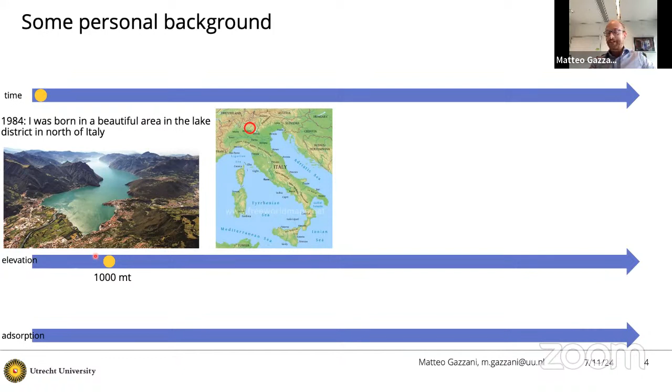I was born in 1984 in a beautiful place - here you see some pictures, north of Italy, where the elevation is about 1,000 meters on average, I would say. Then I moved to Milan for my studies, as already mentioned by Giuseppe.

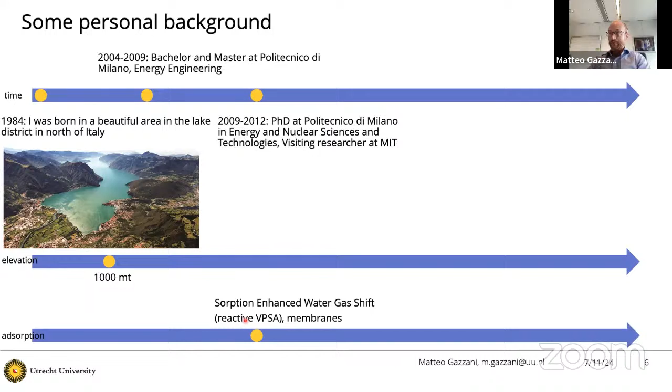During my PhD that I did still in Politecnico, I also started developing my knowledge in adsorption, working on sorption enhanced water gas shift, so a sort of reactive VPSA, and also on membranes for hydrogen separation. Then I moved to Zurich as a postdoc, decreasing the altitude to around 400 meters, but increasing a lot my, let's say, knowledge in adsorption. I worked there on TSA, VPSA, PSA with Marco, Lisa, IAS, and many others, looking at separation of CO2, hydrogen, and nitrogen as well.

Then I continued the line, reaching about zero level, so close, if not below. And today I am an associate professor in Utrecht and in TU/e, and I still work on adsorption quite a lot, mostly looking at challenging separations like CO2 capture from air and methane removal from very diluted streams.

I would like to start with why do we need plant and system level analysis. I'd like to walk you through an example. Here you see two technologies: one on the left, carbon capture from a power plant in Texas, the Petra Nova plant, and on the right, a fuel cell for automotive transportation in personal cars.

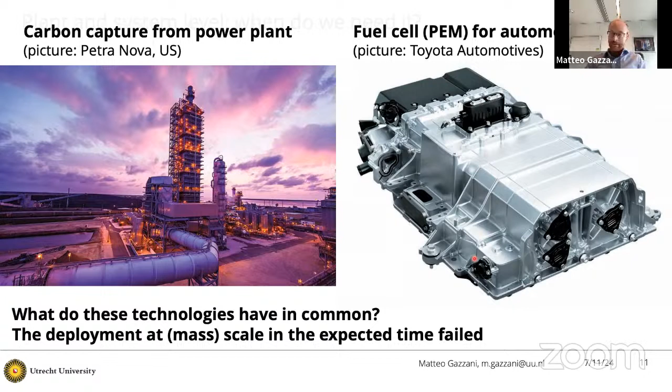You may wonder, what do these technologies have in common? I would say that deployment at mass scale in the expected time failed for both. It's interesting to see that there were a number of common reasons.

There was a wrong primary market on power. CCS looked at the power sector as the very first application, fuel cells worked for personal transportation. In both cases, we had big limits from an infrastructure perspective: CO2 storage and transportation for CCS, and hydrogen production and refueling stations for hydrogen. Also in both cases, we had viable alternative solutions: PV and wind turbines for power plants, and battery electric vehicles for personal transportation.

Also, in both cases, there was a lack of a big enough market. Markets were very localized; instead the big national or international markets were missing—lack of a CO2 emission market, lack of a hydrogen and fuel cell vehicle market. And finally, last but not least, they both experienced problems when it came to societal acceptability, notably CO2 storage or hydrogen on board, let alone the cost of fuel cell vehicles.

This just shows that essentially technologies really need to be developed while keeping in mind their role in the broader energy and material transition. Otherwise, the risk is that we develop technological solutions that are beautiful and work very well, like the two we see here, but they miss their role, and they will miss the deployment at the required scale that we need for the energy and material transition.

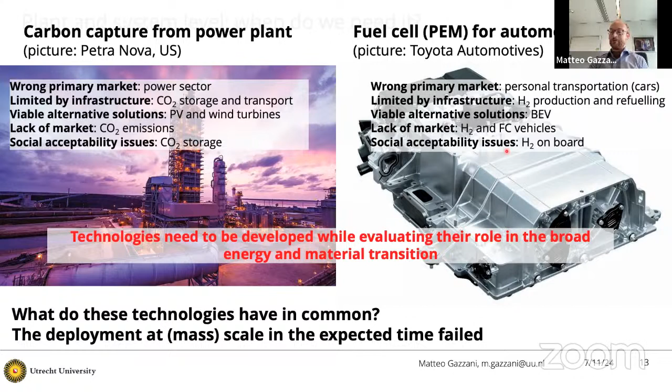Now, if we focus a bit more on CO2 capture, it's interesting to see that starting from around 2010, the number of studies on adsorption-based CO2 capture has really picked up. Today we have around 400 to 500 papers published every year on the topic of adsorption-based CO2 capture.

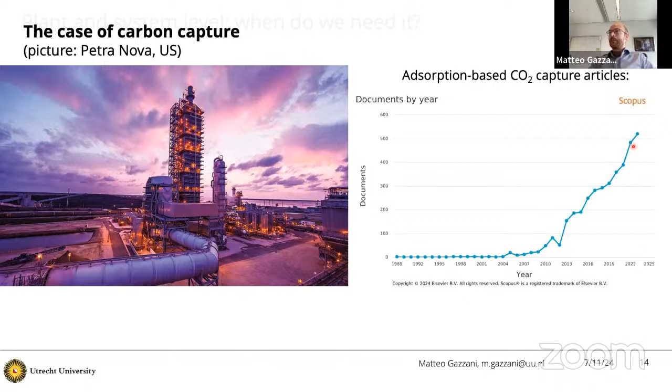In fact, if we look at the cost of CO2 capture, we can see that early on, when the technology started to take off in academia, there were predictions on the cost by IPCC in the order of 50 to 100-plus dollars per ton. There was also a target set by the DOE around 30 or 40 dollars per ton of CO2. Now 20 years and more have passed, and we have built a few plants—if we stick to the power application, Boundary Dam, Petra Nova, and maybe Shand—and the cost has not decreased.

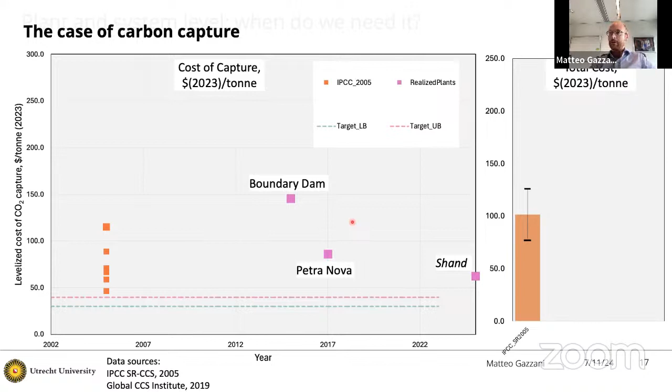Of course, what would you expect from real, first-of-a-kind plants? But notably, if we also plug in a lot of numbers from research—research has been developing and producing a lot of material from pilot to laboratory to simulations—we still see that the cost actually went rather up than down.

So again, creating a sort of disconnection between the expectations, especially the DOE targets, and what was then identified by the many researchers—essentially giving a sort of reason not to deploy the technology because it's perceived as expensive, when it's not really expensive if you think of the role of CO2 capture in the energy transition and in the mitigation of CO2.

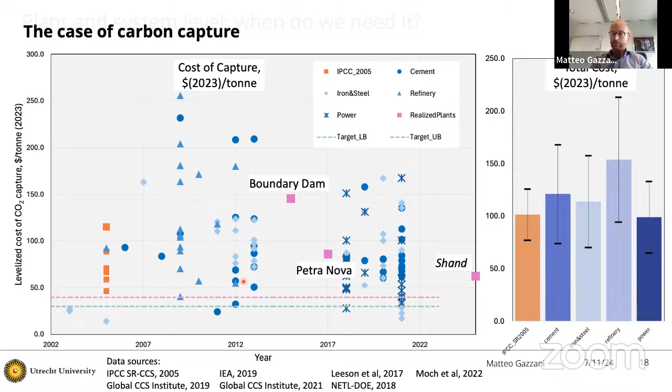This was a kind of introduction to say that we always need to reach the level of plant and system analysis. I really encourage researchers to develop adsorption technologies also looking at the plant and system level. At the same time, I think there are cases where it's more relevant than others.

For example, when adsorption is really a key enabler of the separation, like the separation of highly valuable molecules, fine chemicals, mainly done by chromatography, the separation of toxic compounds like volatile organic compounds, whenever you have very strict environmental regulations, also for applications like wastewater and soil remediation.

So in these cases, plant and process level is important. It's important for optimal plant performance, but not really vital, because the adsorption technologies in this case are really what make the separation possible. So you want to get a better plant, better economics, but if you don't do the technology development following the plant and system level, it will not prevent the use.

However, there are other cases where this is not true. When adsorption is an option among several solutions, if we want to separate molecules in very large amounts, like CO2 separation from flue gas, hydrogen separation from syngas, air separation, or purification of biogas, where we have alternative solutions, it's really important, actually vital, that the technology development is done along with the plant and system level, or rephrasing that, the plant and system level steer the technology development in the right direction.

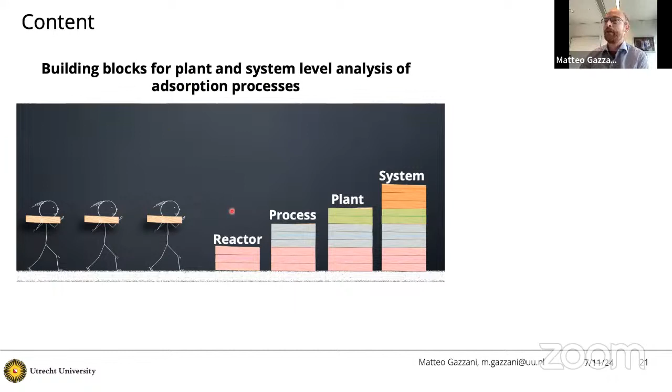In terms of the rest of the presentation, we are going to focus on the building blocks for plant and system level analysis, going from the reactor or column through the process, the plant, and the system level. We will do that by also looking at examples of applications.

Now, first, a few remarks. When we want to merge the reactor level to the system level, these different levels need to be able to talk to each other. So reactor models need to be embedded in the system level, and the system level should provide insights that are relevant also for the column and reactor modeling.

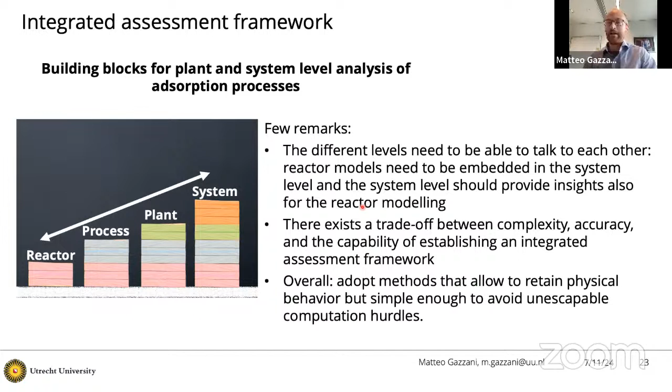Therefore, there exists a trade-off between complexity, accuracy, and the capability of establishing an integrated assessment framework. Overall, I would say we need to adopt methods that allow us to retain physical behavior, but they have to be simple enough to avoid running into serious computational hurdles that can't be overcome. So we need the right level of simplicity while retaining the physics of the system.

All right, let us start from the adsorption column. Here we have a really simplified description of the physical system. We have a column or some contactor where there will be a solid phase, an adsorbent, and a void phase. This system is described by a number of relevant thermodynamic properties.

To simulate such a system, we have powerful equations: partial differential algebraic equations that describe mass balances, energy balances, and momentum balance, for example with the Ergun equation along the bed. These need to be coupled with relevant initial and boundary conditions, like the feed condition, the pressure, and what we fix at the boundaries, like the inlet, outlet, and wall. There will also be a significant number of model parameters to account for, like physical properties, adsorption equilibrium, which is extremely important, with the isotherms, and also mass and heat transfer coefficients or models.

When we want to translate this into models, we have essentially three different relevant approaches. One is a very simplified 0D, well-mixed reactor. Then we can discretize this in one direction, the 1D, and then the 2D or 3D as the more complex versions of the resolution of this system.

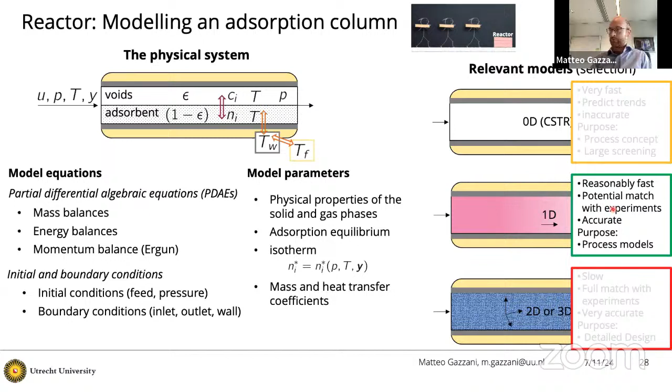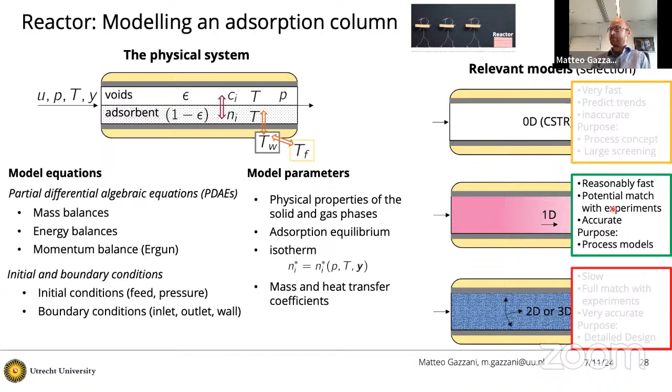Please use experiments to validate the model. There are really a lot of experiments, a lot of literature on breakthrough curves, and also based on small pilots that you can find in literature. So always you start with a 1D model, and when you are confident enough that your 1D model behaves like your physical intuition describes, go to the validation with experiments. And you don't need a setup in-house. You can really take data from the many papers that have done this.

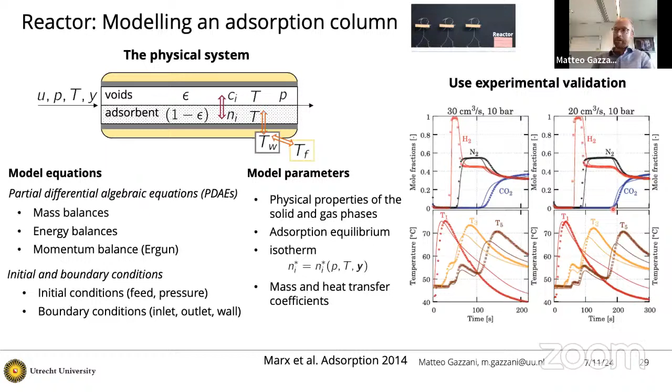All right, now after the column, we need to go to the cycle, to the process, essentially. Let's call it the process. So we need to model now the process for the adsorption process. And it happens that most adsorption processes are carried out in fixed beds, like PSA, TSA, VSA, VPSA cycles.

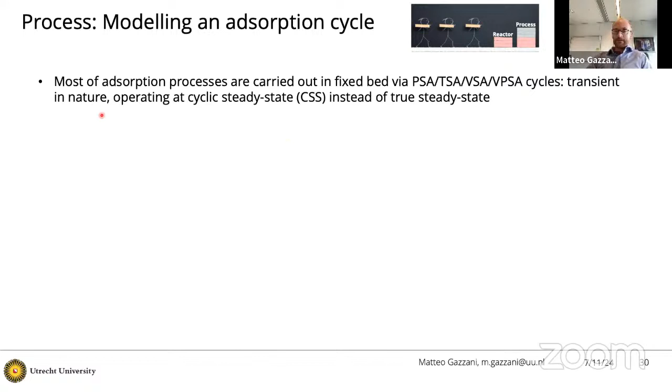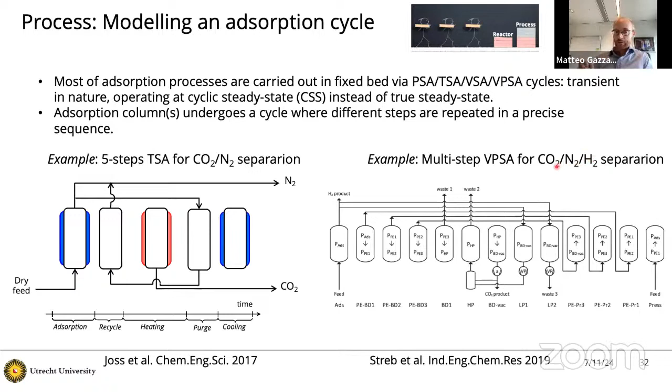So I'm showing these cycles to say that cycle design is a critical step, that even when you do plant and system level analysis, you can't underestimate this, and you really need to take this into consideration and do the proper cycle design that you would do whenever designing a process, even if you intend to evaluate that from a plant and system level. That's because the cycle affects the performance tremendously, and it's a building block of evaluating adsorption processes.

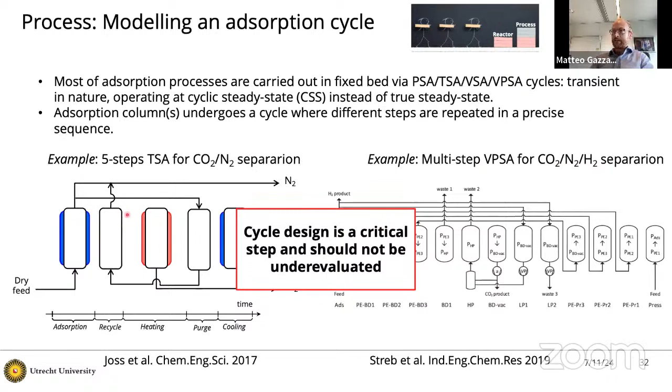Interestingly, this is of course true for a fixed bed experiencing a cycle in time, but is also true for a different configuration where you do have a steady state, like with a fluidized bed. This is an example of a fluidized bed with adsorption and regeneration. So it's a different type of process, still relying on adsorption, but on moving the solids rather than using the different distribution in the bed of the gas and the solid.

And let's say that the equivalent cycle can be designed now in a way in space. So you can identify the right cycle in space by subdividing the two main reactors into a number of reactors. So even when you have a continuous process based on adsorption, please take the reactor configuration, the process configuration into account whenever you also want to do the plant and system level study.

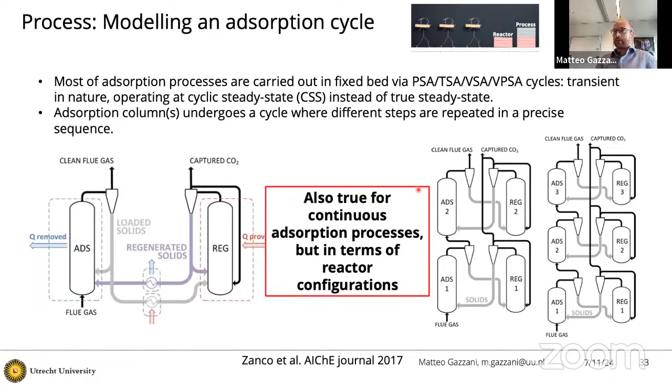Now, a few key points that I would like to highlight here. First of all, identifying cyclic steady state conditions is computationally expensive, because you need to solve the column level equations that we have seen before in an iterative way. For every step in the cycle, you need to solve this, and you need to do that until you find out that the internal composition and the temperature profile do not change, the product composition does not change, and the total mass balance is indeed respected.

So the typical approach, the common practice, is to use a fixed point iteration. This means that from one simulation, you take what you find as a final state, and you send it back as initial conditions for the next iteration. Most of the simulation tools actually use this approach. It's very solid because you go really, as it says, step by step, but it's also quite slow because you will need a large number of evaluations to identify the cyclic steady state.

So I would argue that the state of the art in this respect is tools that use different methods to speed up, accelerate the iteration, like using Newton type or perturbation methods. Levan has done a lot on this, but the problem with these methods is that in most cases they require, for example, the computation of the Jacobian. So you gain in the acceleration of the cyclic steady state, but you lose in the time to compute what you need for that acceleration.

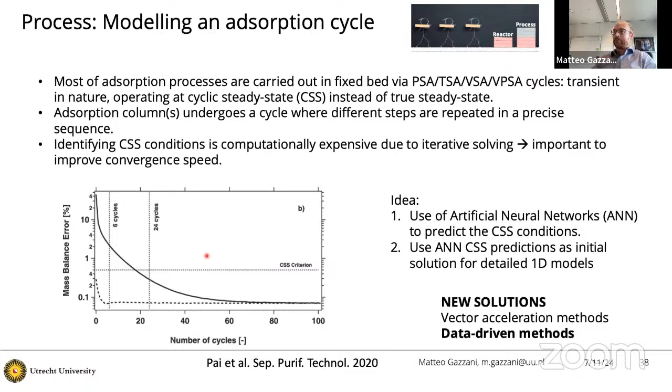Yes, 24. Or you can do it with the vector acceleration method, but eventually you have a faster approach to cyclic steady state.

If we continue looking at the needs for process modeling, I would say that something that is often underestimated is the scheduling of the cycle. So the scheduling is really needed to take into account all the idle times that will be present, especially for complex cycles, whenever you have pressure equalization, whenever you have coordinated rinse and purification steps.

For example, this scheduling will allow you to consider continuous feed. That's something that in a continuous process you want to have in a continuous plant. So let's think of a refinery. You want to have a continuous production of hydrogen in a way. You will be able to synchronize pressure equalization and also to produce continuously your product.

So when you include this scheduling, the performance of the cycle will change. I'm reporting here some results for a hydrogen CO2 nitrogen PSA, and you can see that the productivity of the cycle without scheduling is significantly larger than the productivity when you include scheduling. So we go from 550 kilograms of CO2 per unit time down to 350, and that's because if you want to have a complex cycle that delivers separation, you need to have enough number of columns.

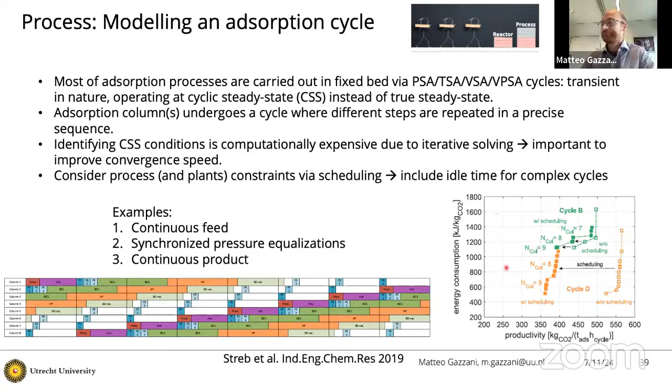Then I will also say that adsorption processes are complex and not necessarily intuitive. There are a lot of variables and the interplay between the different properties. So I think that we really need to make use of this nice tool that is rigorous mathematical optimization to identify the optimal conditions of the technology.

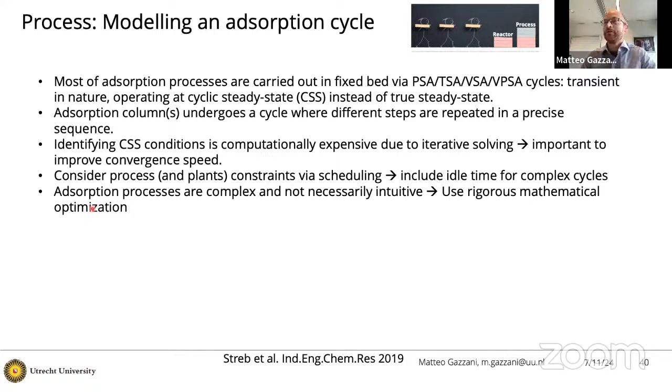Of course, working with a sensitivity approach, like scanning different values and seeing with your hands in a way how the system reacts, is always useful to improve the knowledge of the user. But eventually, I think that the process design should stop when a mathematical optimization is carried out. And I would like to discuss this part more in detail.

So there are a lot of decision variables that are possible. I'm listing here some, for example, the adsorbent material decision, the reactor geometry, the cycle configuration, the cycle step timing, which is very unintuitive at times, the column length, temperature, and pressures.

So these basically lead to three main classes. One is really the cycle, the operation of the cycle in terms of time step, temperature, and pressure. One is about the materials, what materials do I choose, and the other one is really the cycle configuration, so how do I arrange the different columns, what steps I need.

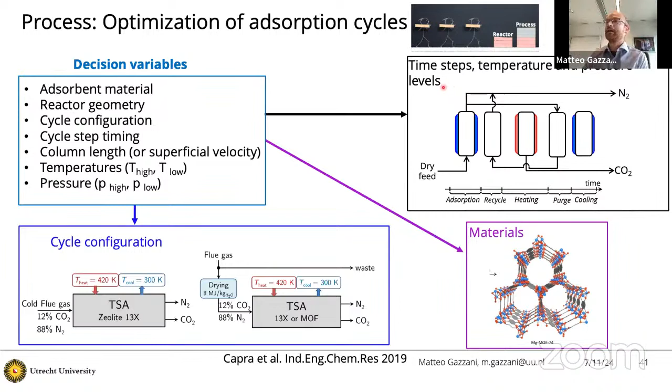I would say that while cycle configuration and materials are important, they are difficult to bridge to the plant and process level. At the time step, temperature and pressure level, mathematical optimization can be embedded in the plant and in the system level optimization.

Now, if you look at the possible approaches for this optimization, we have three main possibilities. The first one that you see here is a black box approach. So what we have is a bed model, let's say the cycle model, and the cycle will need to compute the cyclic steady state that we have just discussed.

And on top of this, we can have the optimization. We can optimize for a number of objective functions. We'll go back to this later. But essentially it's a hierarchical approach: the model, the cyclic steady state, and the optimization.

In a second approach, we can bring together the optimization and the cyclic steady state. This has been done by Pantelides and co-authors, for example, and you can ask your optimization algorithm to fulfill the cyclic steady state condition as part of the constraints of the optimization problem.

And let's say the most extreme case compared to the hierarchical one on the left is where I want to solve everything at once. So the equation-oriented approach, where we bring in optimization, the bed model, and also the cyclic steady state, and also the partial differential equations together in one, and we solve everything in one go.

Let's say that approaches two and three are of interest, but I think that for adsorption processes, the first approach is the state of the art, and also the one that allows interplay with materials and with contactor design easily.

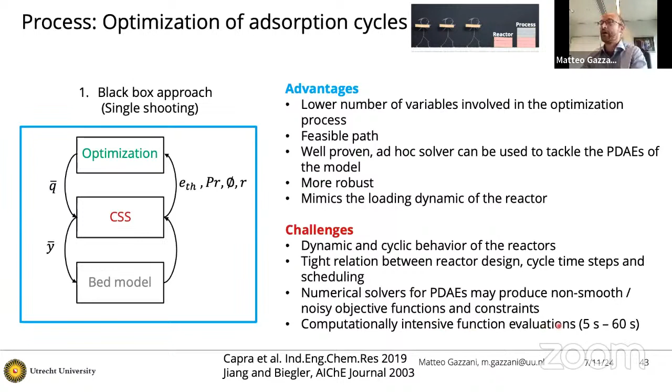And the bed model and the cyclic steady state, as we have already mentioned, are computationally intensive functions that may take from a few seconds up to minutes.

What are the computational approaches to this? I think there are three main avenues. First, we can solve this optimization problem acting on the bed model. This means that instead of using a detailed model, we use surrogate models of the 1D model. We will go through this later.

The second one is to act on the CSS, as we discussed before. So really try to do the optimization with an improved CSS computation, so that overall the objective function evaluation that the optimization sees is not particularly computationally intense, because we do the CSS in a smart way.

And finally, we can act on the optimization algorithm itself. So we can think of tuning algorithms or designing algorithms that deal with the problem, with the features of adsorption cyclic steady state type of problems.

Now let's start looking a bit more at the first approach. I'm taking this from a recent work of Anne Streb and Mazzotti. What they did was have a 1D model, and based on that, they trained an artificial neural network with process parameters and feed composition, making a surrogate model by training the network using data from the 1D model.

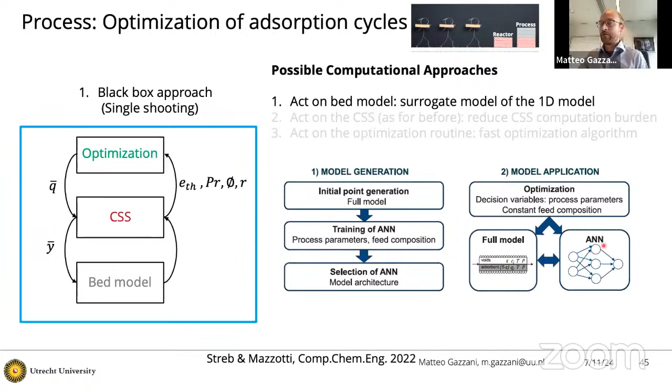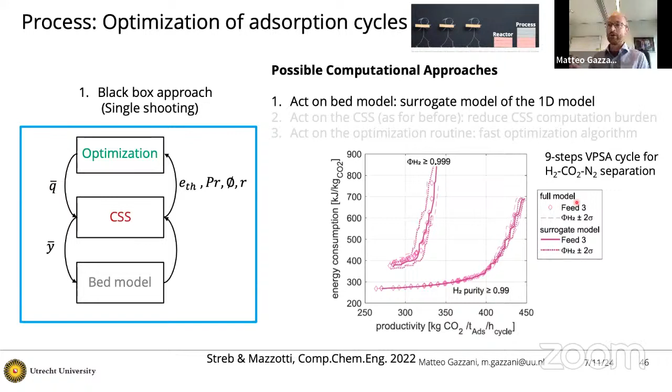You can see that essentially the surrogate model, shown as the continuous line, found the very same Pareto front as the full model. This is, I think, a very promising approach. Please be careful with your training—at the end, everything here boils down to doing the right training and using the right approach.

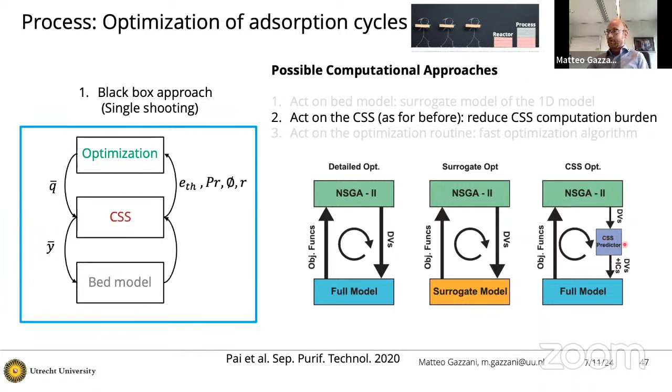Looking at the second approach, here I'm using the work of the group of Arvind Rajendran, who have recently worked on this. They compared detailed optimization, connecting a genetic algorithm to the full model, the surrogate approach using artificial neural networks and other machine learning approaches, and the case of speeding up CSS via a data-driven approach. They have shown that this approach of speeding up the CSS works rather well.

The last one is identifying the right optimization routine. That's where we have worked a bit more, and I would say there are a lot of opportunities in this field as well. Essentially, there are different optimization routines you can use: gradient-based, evolutionary population-based, or model-based, derivative-free.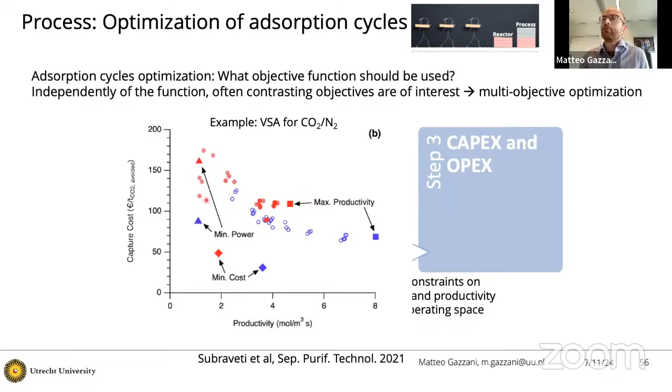By doing this, you may find interesting things. For example, from the work of Subraveti and Arvind Rajendran, they identified that the minimum cost cases - shown here in black, blue and red for different materials - differ from the maximum productivity or minimum energy cases. So these three steps that I was showing before are really helpful to reach the optimal case, and are needed to identify how your system behaves depending on the different boundary conditions.

All right, let's move now to the plant. This will be quite quick. When we go from the process to the plant, I would say there are two main cases. On the left is a simple plant - for example, the adsorption process plus impurities, or the adsorption process plus heat integration. The second case is a much more complex plant, for example the full industrial process, like a refinery, or the example I'll give later with TSA in a cryogenic air separation plant.

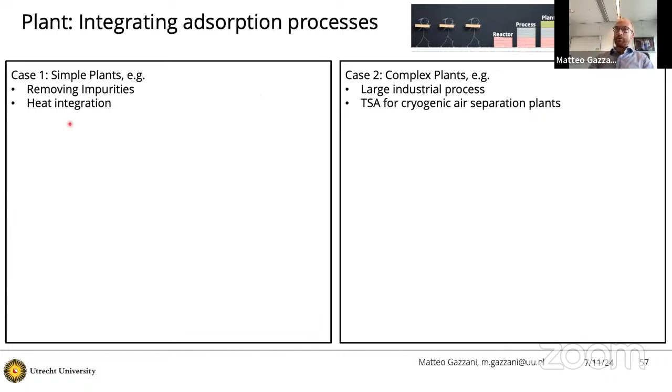Looking at the simple plant on the left, the example here is removal of water along with the TSA we discussed before - because your material, like a zeolite, doesn't want water in the feed. The suggested approach is to keep the adsorption model as the 1D model, the same one used with optimization. So the plant-level analysis can fully rely on the 1D model or any surrogate model you've proven works well. Then you can add simplified energy and mass balances for the additional components, such as heat exchangers or a drying unit beforehand.

When you go to a complex plant - here I'm showing an example from my PhD studies where we wanted to integrate the adsorption-enhanced water gas shift into an integrated steelworks - we had many different reactors, and a lot of different power equipment like gas turbines, heat exchangers, and heat recovery steam generators. In that case, it would be very challenging to use the 1D model. So my suggestion would be to go for a simpler model, but be sure it sticks to the physical behavior. This is nicely done by a 0D model or a trained neural network that you've proven behaves correctly across the whole range of operating conditions.

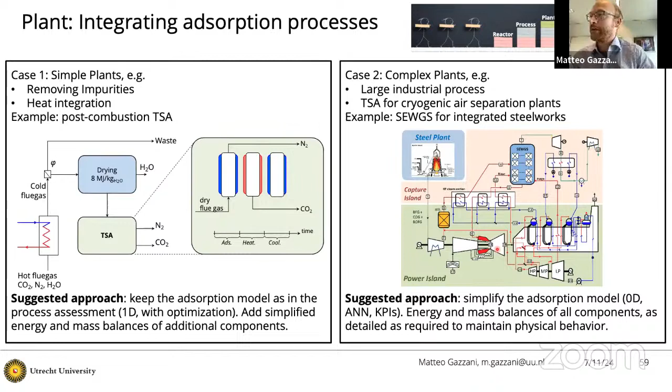And then you can add the energy and mass balance for all other equipment. For example, in this case we were simulating the gas turbine in quite detail with the 1D model because we were particularly interested in that as well. So you need to find the right equilibrium between the thermodynamic description of the model, and here again, simplifying the adsorption process at times is an option.

Now, moving to the system level - but first I think we need to describe what a system is. A system is the union of a process and plant together with everything that counts from the outside world. So typically we have our adsorption process embedded into a plant with a number of processes, and this plant needs to interact with the system.

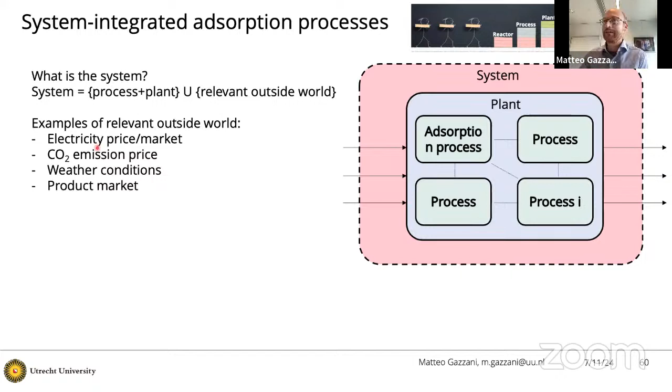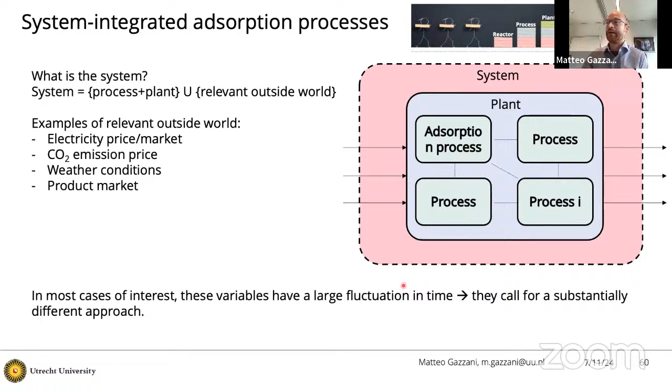For example, it interacts with electricity price, with the electricity market, because we consume a lot of electricity. We interact with the CO2 emission market, but we can also very physically interact with weather conditions - think of direct air capture - or we simply want to interface with the product market, like a hydrogen market where we're not bound to a specific site, like in a refinery, but a more open hydrogen market. In these cases, we really need to integrate the adsorption process and plant with the system. However, the problem is that typically these different variables have large fluctuations in time, and they call for a substantially different approach.

I'm taking the example for the remainder of the presentation with direct air capture - a work that we have done. This was also presented at the last FOA conference, and I think it represents the system-level requirements quite well.

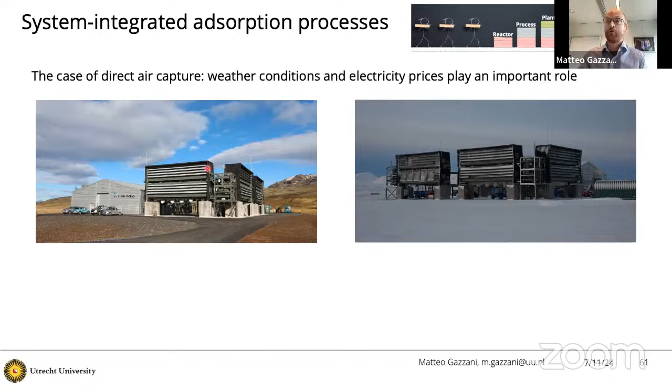Here you see the Climeworks plant in Iceland operating in a summer/spring time versus an autumn/winter case. Indeed, the temperature and humidity of the air entering the contactor is completely different. Here you see some examples of temperature and humidity profiles.

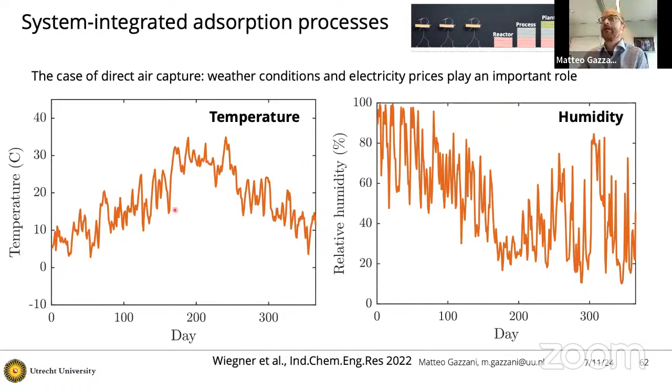This is for California, but the key point is that they have large fluctuations every day, every hour, but also seasonally.

You need to take into account the fluctuations that happen at hourly level, but also yearly level. The point is that your material will behave very differently depending on ambient conditions. For example, with an amine-based sorbent, we'll have a certain behavior with respect to water—the relative humidity might give us an enhancement factor. But also when we go from low to higher temperature, adsorption being exothermic will suffer, and the capacity of the sorbent will decrease because of increasing temperature during the day or month.

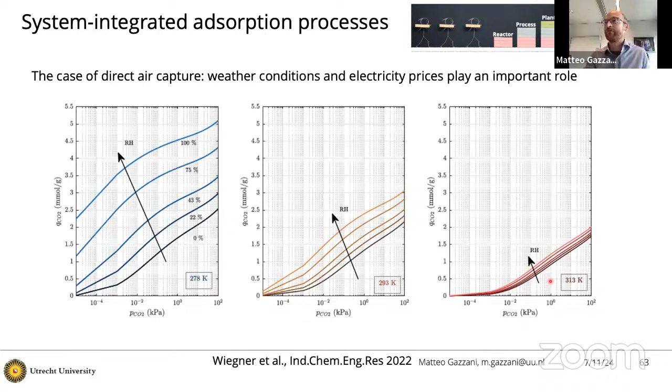So the question is, what type of modeling framework should we use in this case? The approach we showed before, with time and space discretization in the 1D model, is difficult to handle when we want a yearly evaluation.

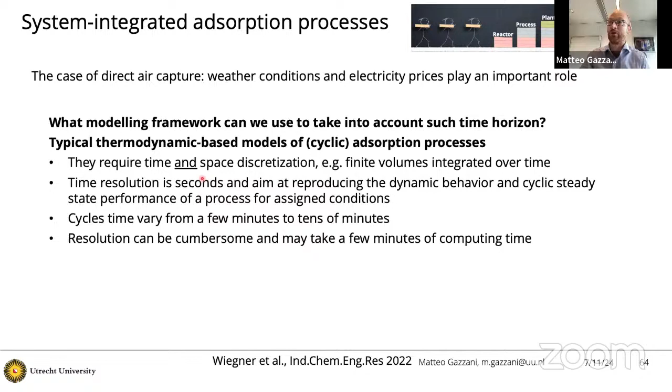These 1D models have a resolution of seconds, or even below seconds, because that's what we need to mimic the system. When we go to cycles, this might take minutes to maybe a couple of hours for long TSAs. But we can't use these models at the year level, so we need a different approach.

What we suggested was to bridge thermodynamic modeling with mixed integer linear modeling, because mixed integer linear modeling is a very nice approach to screen long time horizons, while thermodynamic modeling allows us to predict performance at a higher time resolution. So we tried to find a bridge between the thermodynamic model—what I showed you before for the classical approach to adsorption technologies—and mixed integer linear programming that can handle long time horizons: year, but also multi-year.

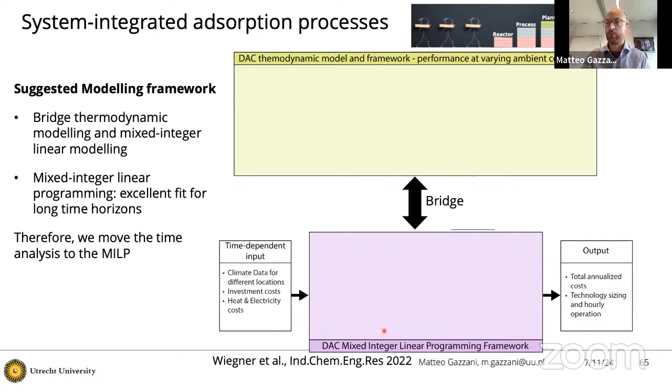The first step is to prepare the thermodynamic model for this application. You need to screen different temperatures, different humidities, whatever factors vary in time. For example, it could also be different electricity prices if you have a TSA driven by electricity, and you may want to see what happens if you modulate the power going into the TSA. In this case, it was different—it was the weather conditions.

Then you can get the Pareto fronts for productivity and specific energy, and bring this into an input-output relation for the mixed integer linear model.

In the mixed integer linear model, we must use linear functions, but you can use functions that predict the thermodynamic behavior well. Along with the linear function, we can use a number of constraints that allow us to retain this physical behavior.

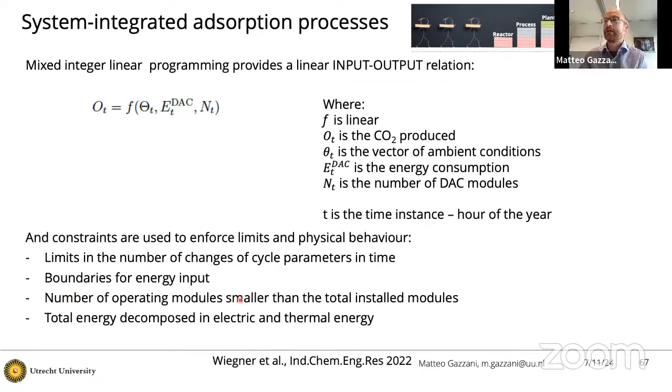For example, limiting the number of changes in cycle parameters over time, boundaries for energy input, the number of operating modules that has to be smaller than the total number of modules, and we can look at different types of energy input. For this function for direct air capture, we rewrote it as a piecewise linearization.

We also have dependency on theta parameters related to weather conditions. Eventually you transform this Pareto function into an input-output relation, where we have the CO2 output as a function of the energy, as a function of the temperature, and as a function of the number of modules.

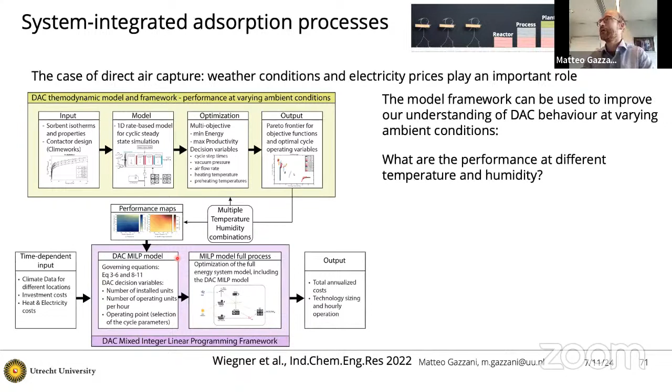Right, I'm taking a bit of time, but I'm finally at the conclusions. I'd like to wrap up a few take-home messages. I think that the evolution of adsorption-based technology should always extend to the plant and system level, to ensure that the right role of the technology in the system is investigated, but also to address the relevant technological challenges.

It might happen that you don't really need to focus on the material for a certain TSA process, but should rather focus on the contactor, or the interplay of the contactor and the material, or the dynamic changes of the contactor material over time if you have a fluctuating flue gas flow entering.

So again, this system and plant level is important to really understand what are the key challenges that need to be addressed. It is possible to have an assessment that bridges the process and system level over different length and time scales. However, you really need to pay attention to choose the right combinations of models to end up with something computationally treatable, so computationally reasonable.

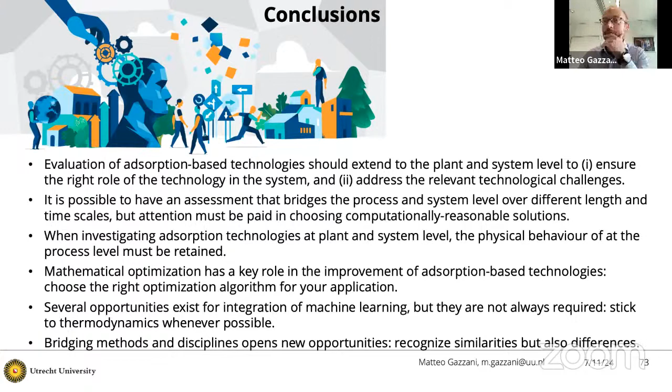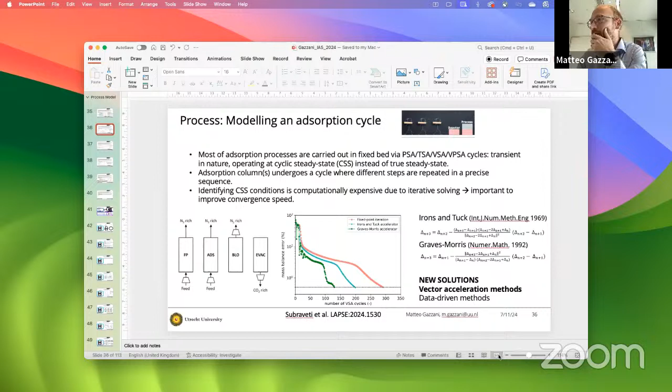Of course, yes. Slide 36. All right, maybe I'll do... Yeah. Slide 36. Yeah, we were talking about the Newton approach, the vector acceleration methods, and so on. But I have a question. For example, in which case, I understand that they might complicate the algorithm of the modeling and then the computational time of the modeling itself. Is that correct?

Well, when you do the typical Newton approach and similar methods, where you need to compute the derivatives and the Jacobian, that will complicate things significantly, because the computation of the Jacobian for a real application is not something straightforward. These types of approaches, instead, don't really complicate things particularly, because these operations are very straightforward, and you are basically operating on the different set of initial conditions. So you are connecting, for example, your n+3 iteration not only with the one before, n+2, which will be the fixed point, but you are also connecting to the previous one with an expression that tries to mimic essentially the Newton method, but without the need for derivatives. So these vector acceleration methods, proposed quite some time ago, they don't really complicate your model. That's nice, you could use it in any kind of cycle, even if it's just two beds four steps.

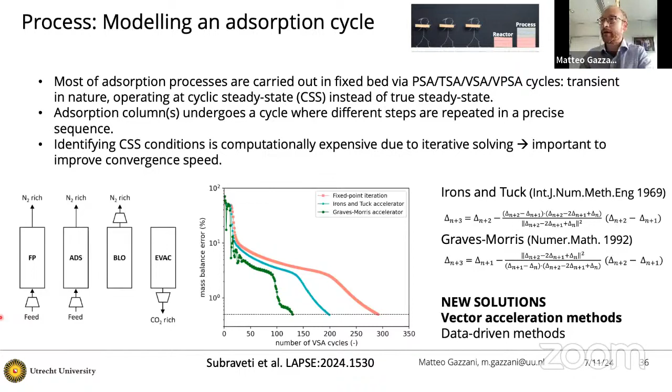By reaction. So in that case, what you need to do, if you go back, yeah maybe here is fine, is in the equations, you need to add in both the mass balance and the energy balance a source sink term that represents your reaction.

So you will have an additional term that needs to account for the fact that some CO2 gets converted, for example, if you are activating the CO2 that is adsorbed with the hydrogen to produce methanol or methane.

And in that case you will have that the sorbent removes CO2, but then there will be a consumption term that needs to account for the fact that CO2 gets also regenerated with the hydrogen, for example. So you need to adjust this equation to account for the reactions and the energy that it involves.

I think it's super clear. We have another question from Dr. Danacci. He says: are the original process Pareto fronts generated based on CSS results? If so, are there any potential issues with the constantly varying feed and potentially never achieving CSS? Cycle steady state.

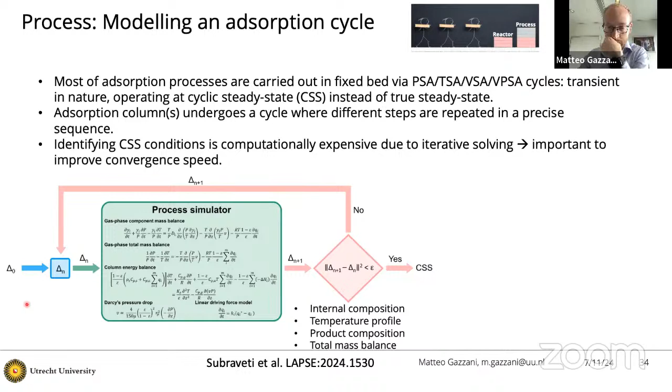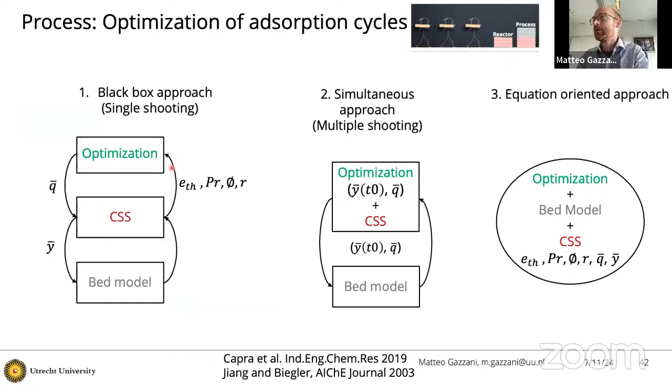What might be challenging though is if you want to simulate, and that connects a bit to the system level that I was describing before, is when you want to disconnect different points. So say that you have a Pareto front. Let me go to a Pareto front. I think he was referring...

Sorry, Matteo, if I can interrupt. I think my question to Matteo was a bit unclear, so it's my fault there. I was referring to the year-long DAC modeling you were showing at the end of the presentation.

Okay, that's where I was going now. In fact, right, yeah. Let me go there.

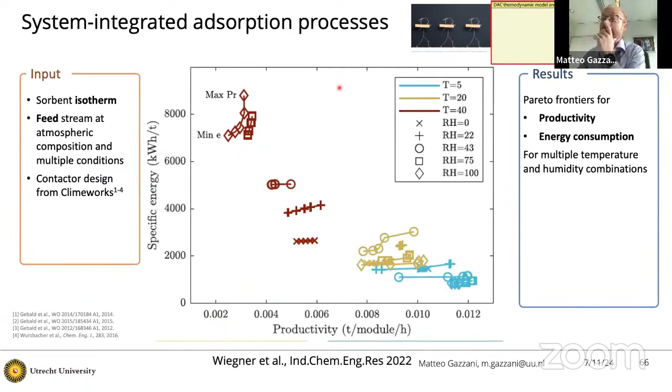Yes, so this is a very good question, in fact, because when you have these maps, and then you select a point, this will give you an energy requirement for a given ambient temperature and relative humidity. Then this is for a certain instant of time. Then you have the next hour, and the next hour you need to identify where you want to operate.

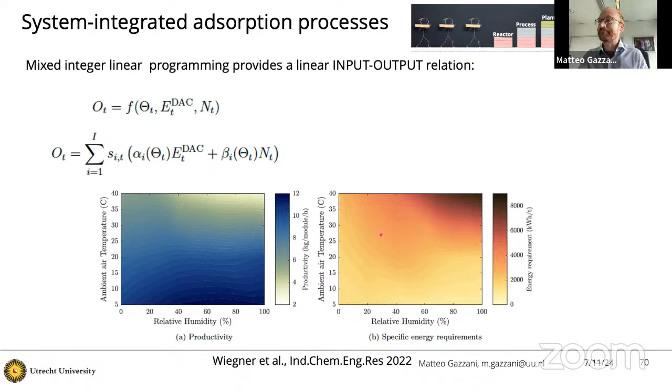And what can happen is that your cycle to reach cyclic steady state requires more than an hour, which would be problematic, right? So what you need to do is to take care of that with constraints. So in our case, for example, in our work, we had a constraint in the MILP that said you can move to another point only if the amount of time to reach a cyclic steady state, in terms of moving from one condition to the other of the bed, is within an hour. Otherwise, you need to be closer to the original point.

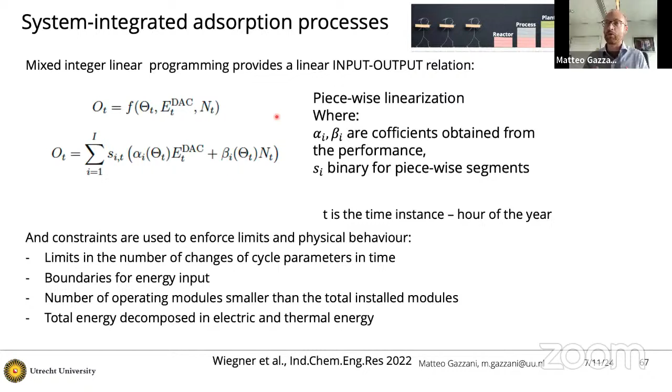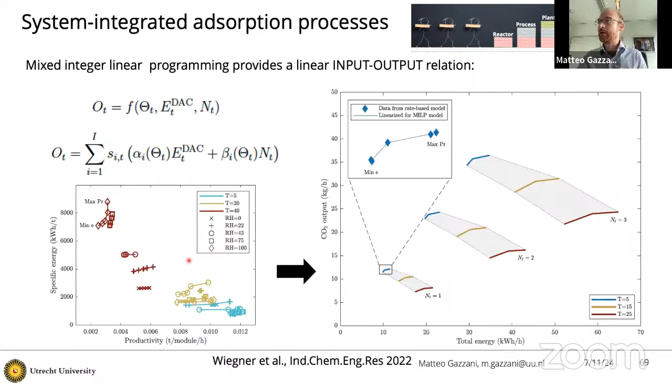But this also opens up a bit the question of really pure control. That is, when you want to move from one operating point to the other, what do you allow to change? And that's what we did with this different operating configuration. So in operating configuration 1, we allowed to always be on the Pareto front. So we said, okay, we have a smart control that we didn't identify. So it will be something really nice for control engineers and academics to identify the control strategy that allows you to stay on the Pareto front.

This configuration 2, instead, was the case where we always had the operating condition fixed. So we were moving away from a reference operating condition at the Pareto, and then things were changing with the weather condition, and the resulting operating point would be in a different position. And in fact, that different type of control leads to a completely different operation in time. But indeed, good point — this has to be adequately taken care of, typically with constraints in the MILP.

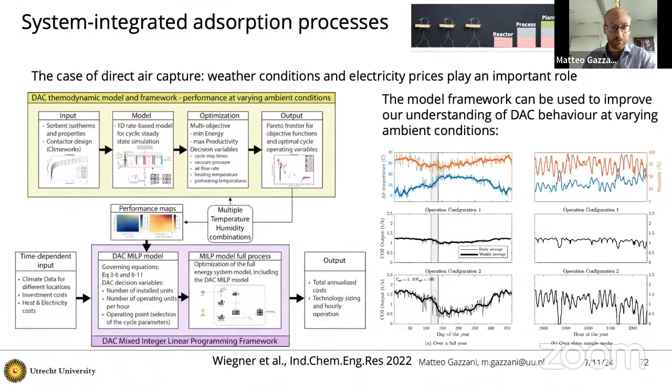It was about the gradient-based, evolutionary, population-based, model-based, derivative-free approach. So that's more a personal question: what is the one that you have used the most, or do you have any preference here?

Yes, let me see where that reference is. So you can refer to this paper, Jiang and Biegler. They discuss many of these things. And also in the paper that we wrote, we discuss a few of these things.

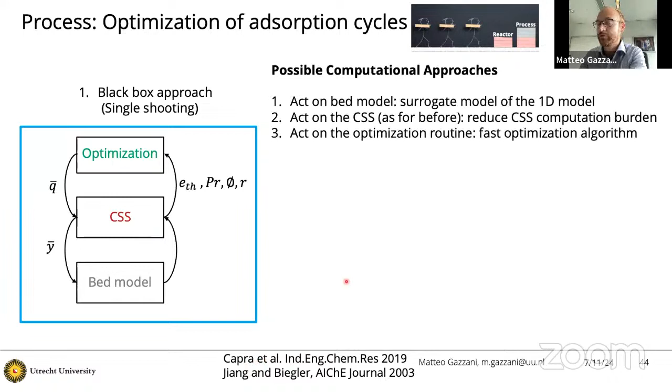So I would suggest you look into these two papers. And I must also say that, a priori, gradient based methods really aren't working well for the type of problems associated to adsorption. But in principle, one shouldn't decide a priori that one approach is better than the other. So one should look into what the different possibilities are. I'm not a mathematician, so...

For us it was about what do we think is the best algorithm that would fit well for adsorption, for cyclic based adsorption, and we identified the MCS. But there is also this CMAES algorithm that you can find on GitHub by Artur Schweidtmann, who is professor at TU Delft. That works also very well.

And also, I think commercial solvers like BARON, which is an optimization tool more than an algorithm, designed for non-convex, nonlinear problems, might work very well too. So there are multiple options, and one shouldn't just stick to one or the other. Just see what works best for your application. Always try a few if possible, essentially.